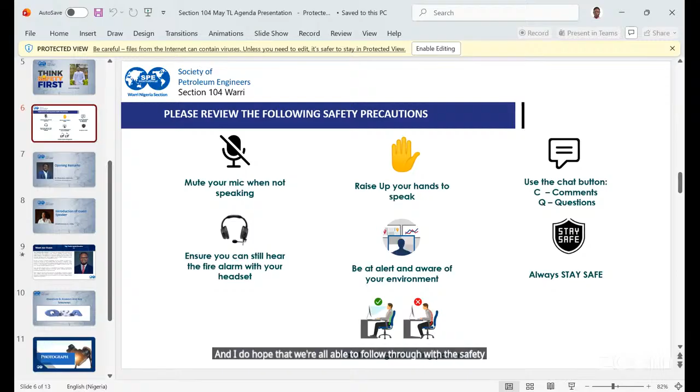This is another eventful technical session, and we are privileged to have Engineer Dr. Oluwadero on the call with us. It's an honor to have him as one of our technical presenters.

I want to appeal for everyone already on the call. Please, this is one of the rare opportunities where you hear technical professionalism coming into play in the sense of flow assurance. Please, for every student, young professional that hopes to be involved in flow assurance, this is an opportunity and eye opener. Get your pens, get your things ready to learn.

And for some of the student chapter presidents I'm seeing on the call, kindly put it on your general platform, let your people join now. I'm not seeing PTI especially being represented yet. I'm not seeing FUPRE being represented yet. And I'm not seeing most of my young professionals joining, let's assume it's because of movement, rain, and the rest.

So I believe in the next 5-10 minutes before the presenter will go into details, a lot of us would have joined to learn for this August presentation. This is not just a lecture. This is not just a teaching. This is actually a technical presentation with the right perspective to delve more into flow assurance for all.

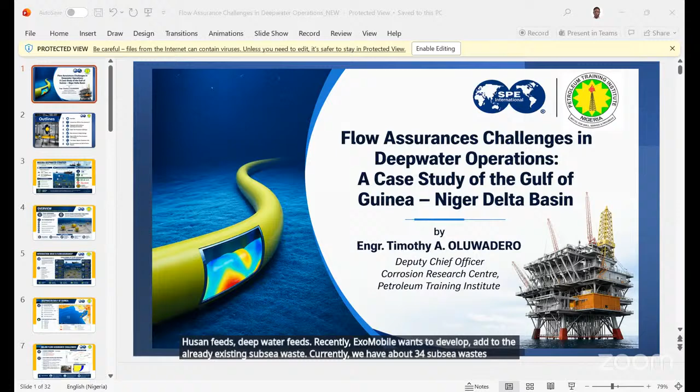So Nigeria's current strategy is to look to deep water development, where there's reduced vandalism, stronger asset security, and stable production systems. We've heard that companies like ExxonMobil and Shell were disinvesting from Nigeria, but predominantly we see them coming back one by one, investing hugely in deep water fields. For example, at Usan deep water fields, ExxonMobil wants to add to the already existing subsea wells. Currently there are about 34 subsea wells there, and they're about to add more, rejigging the operating systems to bring forth more production from these brown fields, spending about $1.5 billion in investments.

Also in Owowo, ExxonMobil says they will reach the final investment decision as early as 2027, projecting about 7 to 8 billion dollars for that decision, as there's about a billion barrels of developed resources within the Owowo field. In the ERHA field, they're currently extending the production sharing contract to 2042. So a lot is going on in deep water operations currently.

As a matter of fact, my slide is about one week old. Day before yesterday I heard Shell saying they are ready to put about $20 billion into Bonga Southwest field, where they expect to get about 150,000 barrels per day and about 140 million standard cubic feet of gas every day. So a lot is going on in our deep water operations, which is a strategy to rev up production in Nigeria.

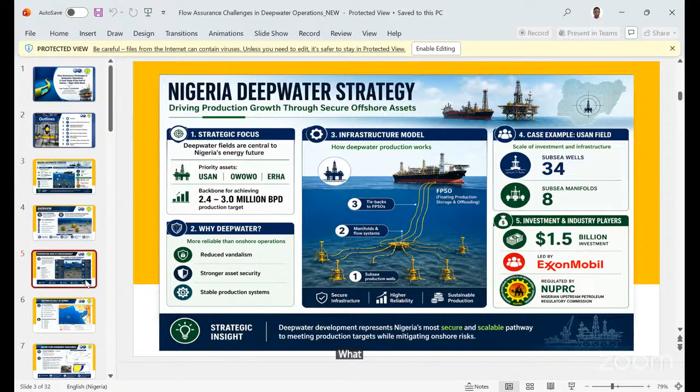This leads us to what we call flow assurance. With deep water operations comes the most critical technical and economic risk, which is flow assurance. This combines a lot of factors: operating in the water body, the ultra deep water conditions, whether to the FPSO or the platform, requiring long tiebacks of pipelines, risers, subsea wells and manifolds back to the platform or FPSO being engaged.

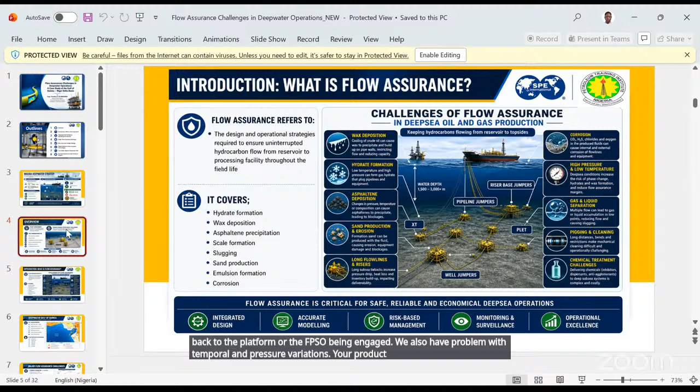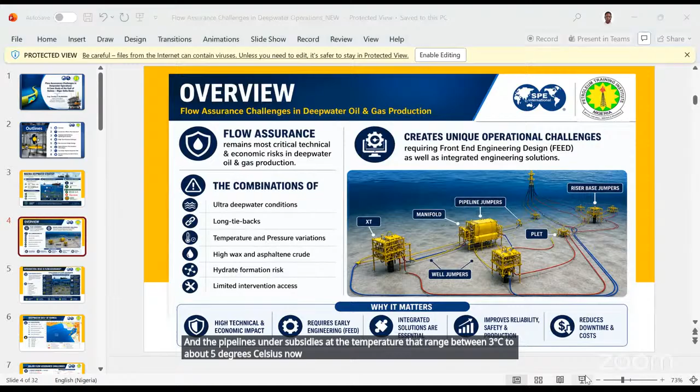We also have problems with temperature and pressure variations. Your crude oil comes from the reservoir at maybe about 80 degrees centigrade, while the pipelines under subsea have temperatures ranging between 3 to 5 degrees Celsius. So immediately the crude at 80 degrees centigrade meets that low temperature, it begins to lose heat through conduction and convection. When they lose their heat, there are big challenges, as we'll see later in this study.

Then also we are talking about deep waters, as we will soon see, some of these are between 1,500 meters to 3,000 meters deep water bodies. So interventions are limited. Access to well interventions and all that are very, very difficult.

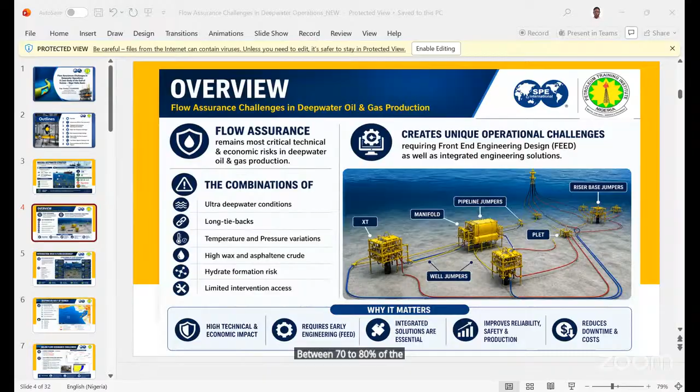So in setting up deep water operations, you have to first consider what is called front-end engineering design. This front-end engineering design is the detailed pre-construction engineering that defines exactly how the project needs to be executed. This must come between your conceptual details and engineering, procurement, and construction. As a matter of fact, at this point, between 70 to 80% of the final FID, that is final investment decision, must have been made.

So to develop this oil field, you need to set in place beforehand how are we going to produce it. What provisions are we making for wax depositions? What are we making for hydrate formations? What are we making for well interventions? So it starts from that period.

So you need integrated solutions that are planned beforehand before you move to deep waters. You don't just start in the middle. It will cost money, it will lose production, and so on and so forth. So let's see what flow assurance is per se.

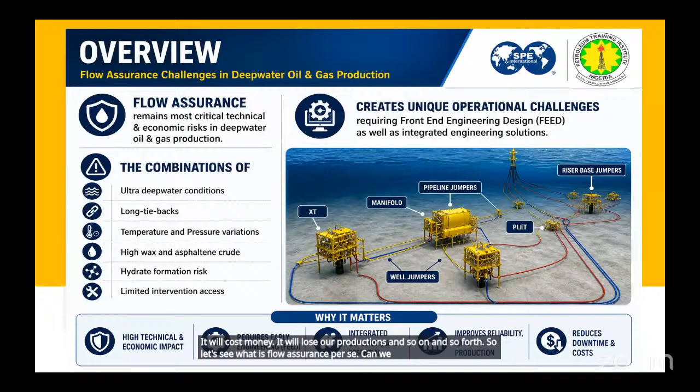So what do we have? We need flow assurance designs that cover hydrate formation, wax deposition, asphaltene precipitation, scale formation, slugging, which we will see very soon, sand production, emulsion formation, and corrosion. I just highlight a few of these as we go on in this presentation.

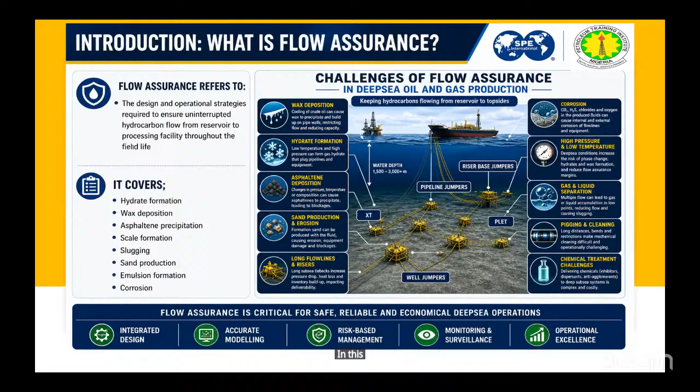So we are talking about the Gulf of Guinea currently. The key characteristics of this Gulf of Guinea involve water depth, as I've said, between 500 meters to 3,000 meters - that is very deep water. The seabed temperature is from 3 to 5 degrees Celsius. And we have long subsea tiebacks, so we can have about 20 kilometers to about 120 kilometer tiebacks. So our riser could be about 3 kilometers high, while the subsea tiebacks could be between 20 kilometers to 120 kilometers - that is essentially long distance.

So the temperature that comes into the wellhead, before it gets to the PLET or before it gets to your processing platform, the temperature is gone. Then you fall into a situation whereby hydrates could form, wax could be deposited, asphaltene could be precipitated. Then there are a whole lot of other situations, slugging could come in. So as I've said, we have limited intervention within this Gulf of Guinea.

So in the Niger Delta, we have typical fields within that Gulf of Guinea. Some of the fields we have are Bonga field, Agbami field, Egina field, Akpo field, Erha field - those are some fields. These are familiar fields that we all have, and these are deep waters. Some of them are brown fields. Some of them we are opening up, as we currently have the Bonga Southwest field that I told you just now - ExxonMobil is proposing to invest about $20 billion in that regard.

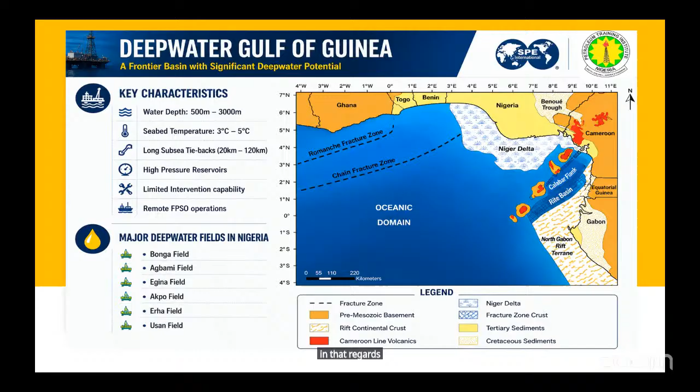For hydrate to form, there are situations that help accomplish that. The first one is that the pressure must be high. The well pressure is high, and you can begin to see a little bit of reduction within the pipeline as it flows from the reservoir, but the pressure must be high. The temperature must be low. And also, there must be water, the presence of water.

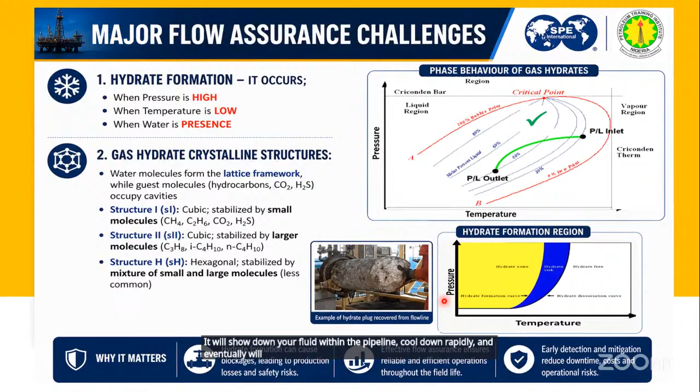You don't want, during shutdown, your fluid within the pipeline to cool down rapidly and eventually lead to hydrate formation, providing the conditions that favor hydrate formation. So let's go on to the other slide so we don't waste so much time here.

So for example, this is our wellhead condition. As you are producing, as your fluid is coming from the wellhead, going towards this one, the pressure is relatively not too low, but it's still high, whereas the temperature is steadily coming down. If you continue to do that, you will fall within these hydrate risk zones where the fluid within the pipeline will form hydrates.

So what you want to do is offer an operating condition that returns this back to favorable conditions where the temperature is still high and the pressure is low. So that's what you want to do.

So sometimes, as I mentioned earlier, what people do is add inhibitors. But you also have to be careful because inhibitors are expensive, like the MEG, monoethylene glycol inhibitors, which are highly viscous. If you don't know how to apply it effectively, it can also cause the fluid to become more sluggish, so you don't have to apply so much.

You just want to get your hydrate equilibrium curve to a safe and optimized region, the green line over there. If you have too much inhibitor, you'll have the hydrate formation curve far to the left, which is over-inhibited. This is over-inhibited condition, this is low safety margin, and this is under-inhibited conditions.

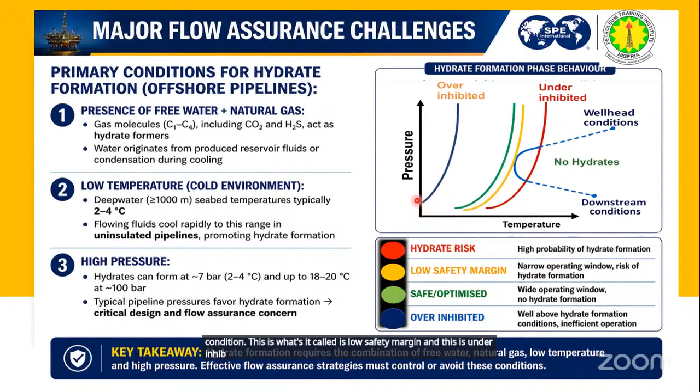In Niger Delta crude, we also have the problem of wax deposition. Nigerian crude is highly paraffinic, with about 30 to 45% of our crude having that composition of hydrocarbons, so there's a great challenge about wax deposition. It can cause major operational issues including pipeline blockage, decline production rates because it fills up the entire cross section of the pipeline, and it costs a lot to carry out remediation and maintenance once this wax deposition has formed.

We have a number of factors that lead to this. As we said, temperature is most dominant. You want to avoid the wax appearance temperature.

Then, pressure reduction. As the pressure reduces from reservoir or wellhead conditions and the fluid continues to flow, the gaseous content within the production fluid begins to get liberated. As the gas is liberated, the fluid becomes more viscous, which becomes a favorable condition for wax deposition to set in.

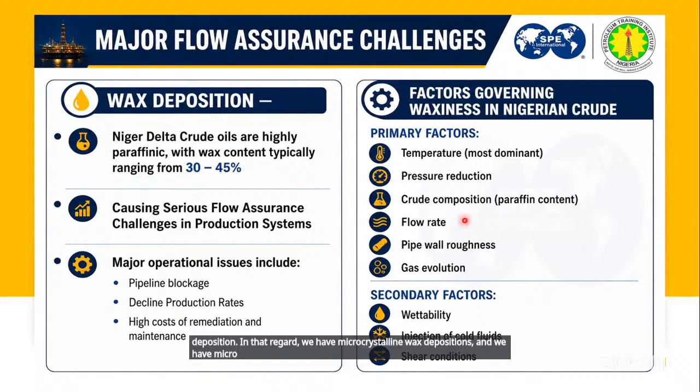In that regard, we have microcrystalline wax deposition and we have macro, as we soon see. The paraffin structures that lead to this wax deposition include what is called straight chain, which are normal paraffins, and the branch chain and cycloparaffin chains, that is naphthenes, which also form this wax deposition. You can see here.

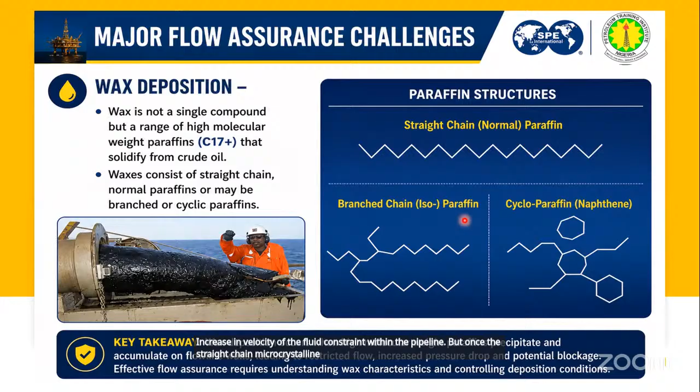As you can see here, we have the straight chain paraffins, which are responsible for the formation of microcrystalline wax deposition. Why is that? They are able to form tightly and neatly a lamellar structure that is very difficult to break, with high melting points. Unlike the amorphous wax deposition, formed by the cycloparaffins and branch chains, which are softer and thicker—they are not as strong, and can easily be sheared by an increase in velocity of the fluid within the pipeline. But once the straight chain microcrystalline wax molecules are formed, they are very difficult to remove. That's the contribution of the chain structures of these wax molecules.

There's even another situation, especially during shut-in or shutdown, where if the temperature of the crude oil continues to reduce and stays below the wax appearance temperature for too long, you form a gelation kind of fluid that is very difficult to move.

As a matter of fact, you cannot move it until you overcome a threshold shear stress that must be applied, which sometimes will be more than the normal operating pumps, before the flow can proceed. Once the wax causes the crude oil to gel, as we have here.

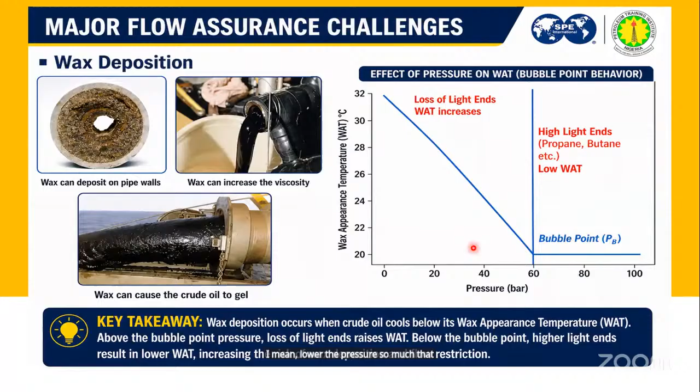So you want to also maintain, you don't want to go below bubble point as you even depressurize, so that the wax problem, because you are running from hydrates, you don't want to lower the pressure so much that it crosses the bubble point. So these are give and takes that goes on with planning and flow assurance within deep water operations.

So like I said before, once your wax causes your crude to gel up, you need what is called breakaway yield strength, which people dealing with multi-phase fluids call the Bingham model, to overcome the yield strength before you can have a reasonable flow again.

Sometimes when these wax fluids get deposited or our fluid becomes dilated, what happens is that we have what is called thixotropic nature of fluids, whereby increase in shear rates definitely leads to reduction in viscosity once we overcome the yield strength.

So you don't want your crude oil to gel within the pipeline, because it costs more, it takes more effort to be able to get the fluid flowing again. And as I said initially, we have two main wax deposition mechanisms: molecular diffusion and shear dispersion. Molecular diffusion is what we have when we have laminar flow.

As I said before, we have laminar flow when the viscous force is greater than the inertial force. So they are dominated by molecular diffusion driven by temperature gradients. What I'm saying here is that when you have your pipelines and the fluids are flowing gently, easily, the wax deposition mechanism is called molecular diffusion.

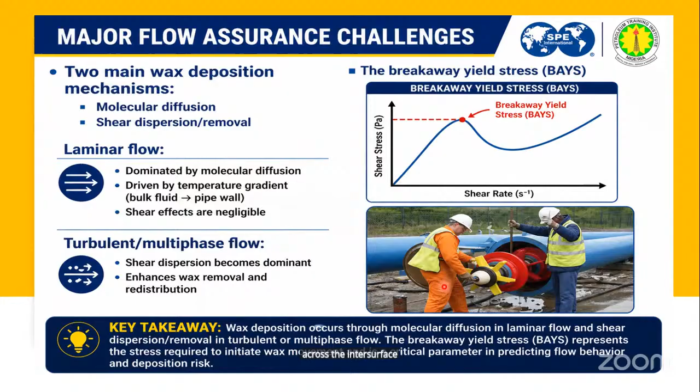So in short, this is the breakaway yield stress I was talking about earlier. You can calculate it, it can be modeled. This is the pipe diameter, this is the pressure, this is the differential pressure, this is the length of the pipe. You can calculate the needed breakaway yield stress to mobilize already gelated crude oil within your pipeline. So that can be used to calculate the shear stress, the threshold shear stress that you need.

So let's talk more about this diagram. Let's say we have a pipeline that ordinarily has an overall heat transfer coefficient of 10 watts per meter square degree centigrade. Then as our crude oil flows from the wellhead across this distance, 2,000 meters, 4,000 meters, 6,000 meters, and so on...

The red line here is the wax appearance temperature. This is the temperature where the wax molecule begins to nucleate, crystallize, and deposit. So as your fluid continues to flow, by the time it gets to 2,000 meters, the temperature of your fluid is already getting close to 60, 50, and then you have crossed the wax appearance temperature. Then wax has begun to form within the pipeline.

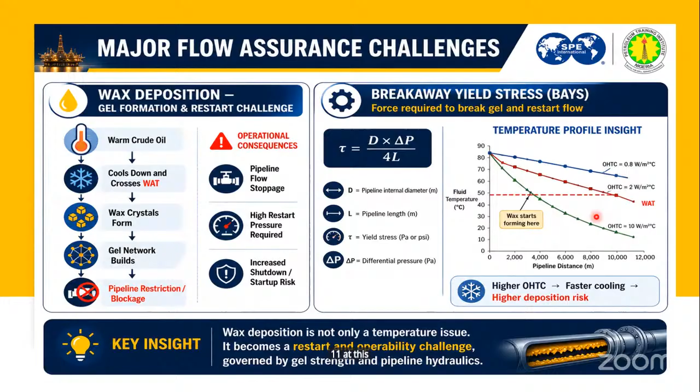Thank you sir. Some other challenges that we also have is slugging, and there are different kinds of slugging. We have stratified flow, stratified wavy flow, plug flow. Slugging happens when you begin to have within your pipeline the intermittent flow of liquid plugs as well as gas pockets flowing together. This can cause serious problems within a pipeline.

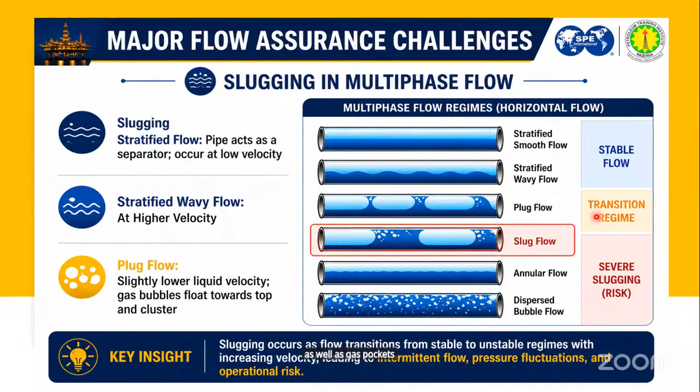There are different types of slugging mechanisms. We have hydrodynamic, we have terrain, we have severe riser slugging.

Let me just speak more on this severe riser slugging because of time. You have your riser connecting from your pipeline to the FPSO or your platform. What will happen when you have a long stretch of liquids and pockets of gas is that when it gets here, the reason why this happens is because gas travels at higher velocity. Gas produced within your pipeline travels at higher velocity than water, which is expected, or than crude oil.

What happens is that when the crude oil gets to the base of the riser, it settles there and blocks the pathway of the gas. As it settles, gradually there's a large liquid slug, but gas starts to build up behind that slug. Then at some point, the pressure of the built-up gas will suddenly push the crude into the separators and all those things, which you don't want.

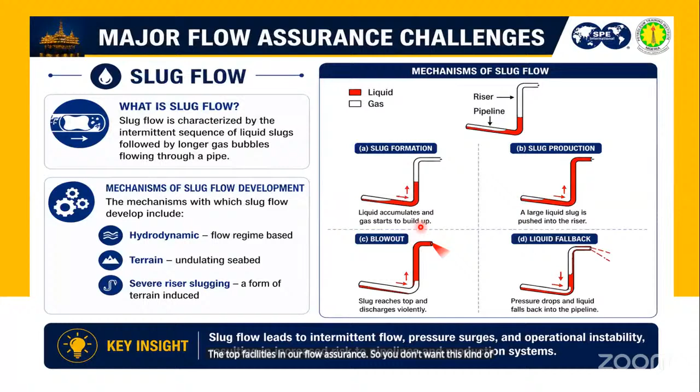Number one, it causes unstable production. It causes your separator to be overrun or flooded, so you cannot specifically separate the liquid from the gas or from the water and oil. It also comes with vibration, structural stress, and facility loading that can damage the topside facilities in our flow assurance. So you don't want this kind of production, but you do have it if you cannot predict this kind of flow that happens within our facilities.

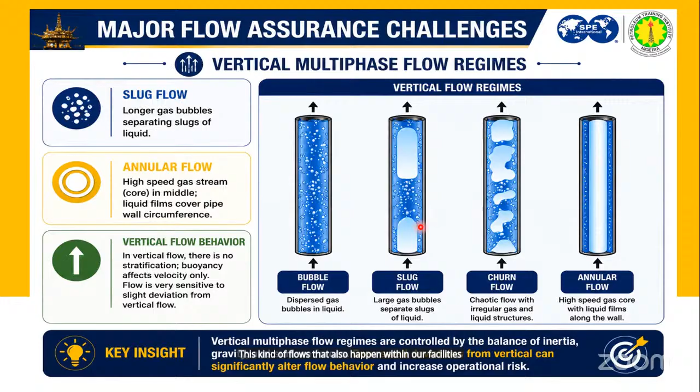The slide will be available, and we'll go through some of these things. So what do we do now?

Let me slow down a little bit to explain this. Let's assume this is our crude oil, this is our pipeline, this is our insulator, and this is another pipe and pipe system. Your fluid temperature is highest at this point. Then via convection, the fluid is losing its heat, moving from this fluid to the pipeline material.

Then via conduction, the heat is also flowing through this material to the insulator. Then via conduction as well, it moves from this insulator material to the outer pipe. Then via convection, the heat flows from this pipeline to the ambient seawater. You can model the flow, the heat flow, for each of these elements, and eventually get the overall heat flow rate across this design.

So you want to manage heat transfer. You want to be sure of the kind of property that will get you the amount of heat flow rate that you need. You can easily model this.

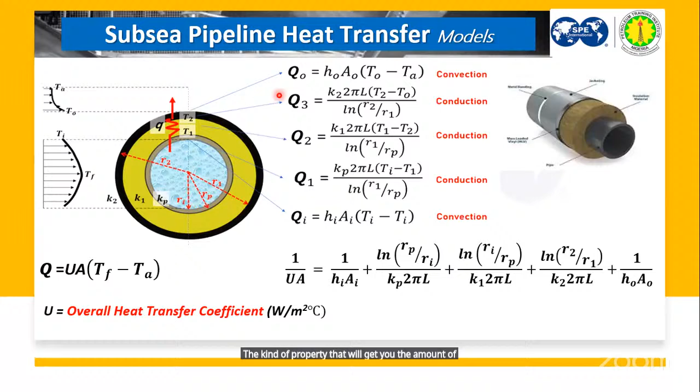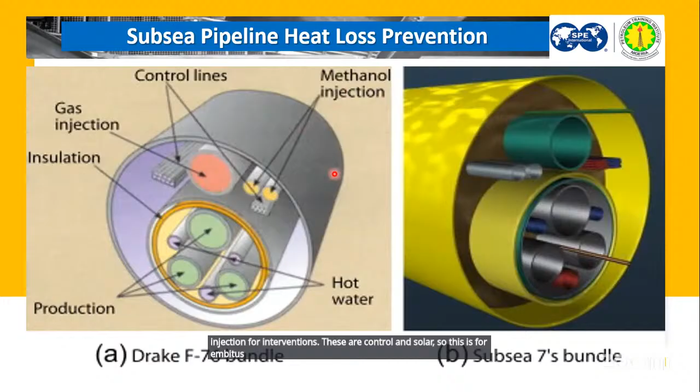This is also a pipe-in-pipe situation where we have this production pipeline. Hot water is being supplied through some pipeline within this one. This is an insulation, this is gas injection for interventions, these are controls and so on, and this is for methanol injections and so on. So these are some of the designs laid within the seabed.

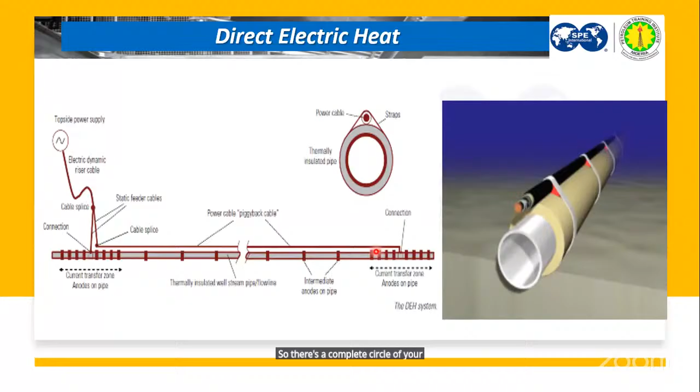You can also do what is called direct electric heating, where you use alternating current and use your pipeline as the conductor. Because there's a heat of resistance, it will be generating heat, and that heat will be warming up the fluid composition within the pipeline. You send a return cable back to the platform, so there's a complete circuit for your pipeline. This will help you warm up your fluid, especially during shutdowns.

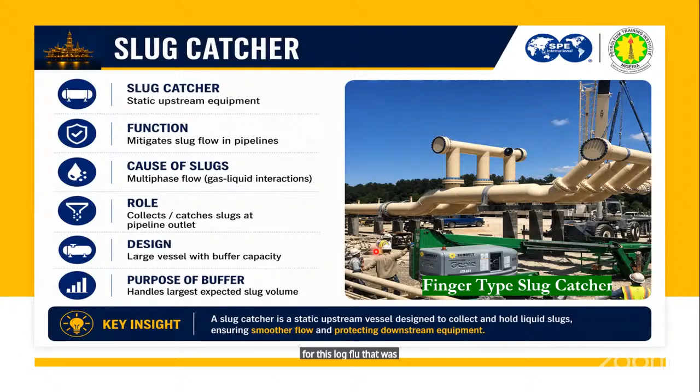These are also some other methods. Another method we use is the slug catcher, for the slug flow that I was explaining earlier. We have mainly two types: the finger type slug catcher and the vessel type slug catcher. These help prevent all that vibration and so on.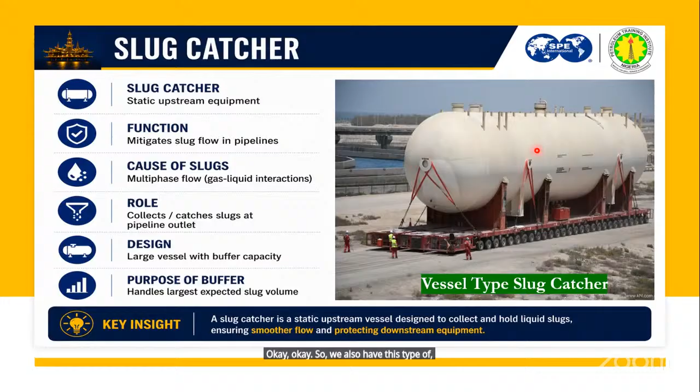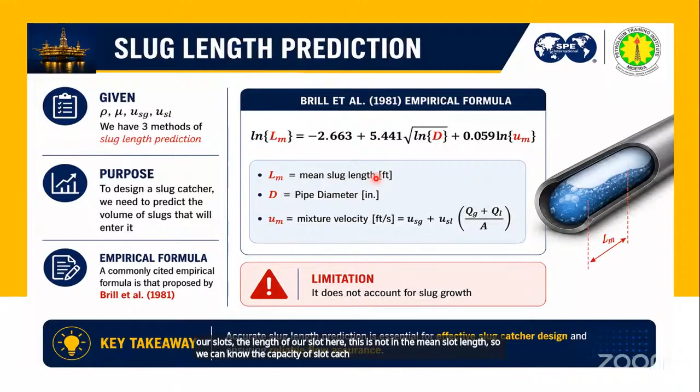So there are a number of models we can use, empirical formulas to predict our slug growth, I mean the length of our slugs here. This is modeling the mean slug length, so we can know the capacity of slug catchers we need to put in place based on the conditions of our operations, and so on.

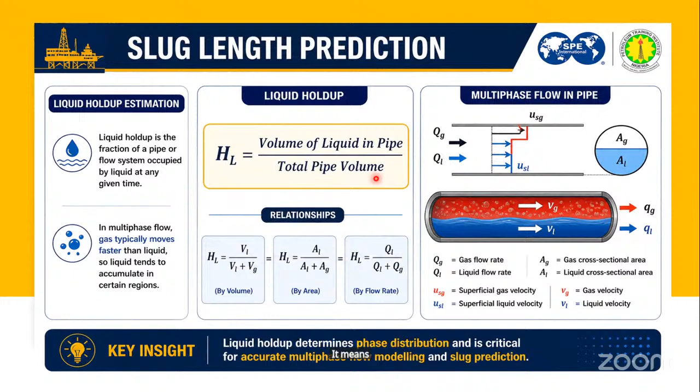Also, there's a model in the slide for calculating liquid hold-up. Liquid hold-up is defined as the fraction of a pipe or flow system occupied by liquid as opposed to gas in any pipeline flow system. The models are available for discussion, and there are methods for modeling liquid hold-up. Some methods assume what is called no-slip conditions, meaning the velocity of the gas and velocity of the liquid are the same within the pipeline, which is not reality. So this alternative method is better to predict liquid hold-up.

So we have a few fields in Nigeria. We have what is called the Bonga field.

It commenced production in Q4 2005, not 2025. Some of the documented flow assurance issues we have in that regard are high pressure, low seabed temperature, severe slugging, wax depositions, and so on.

The conditions around this are that the water depth is about 1,000 meters, and the subsea tieback is about 2 to 10 kilometers. This is not even that long. We have long multi-phase flow lines, cooling, terrain slugging, and all that.

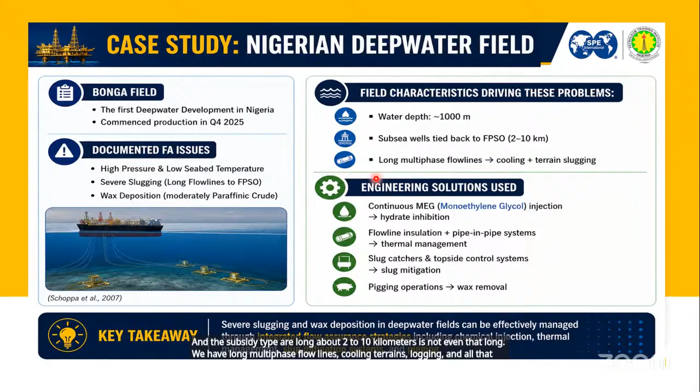The number of engineering solutions available are also listed. We also have, as for the Erha field, documented flow assurance issues such as hydrates, asphaltene deposition, emulsion effects, complex reservoir fluid, deep water cooling and pressure drop, long flow paths, and long multi-phase flow lines.

These are some of the things. Engineering solutions currently used include management of hydrates, asphaltene inhibitors, heated flow lines in critical sections, and so on. OLGA is one of the software we can use to also manage some of these deepwater facilities.

I hope that SPE can facilitate cooperation between the industry and training institutes like Petroleum, where we can get student licenses to use this software to train them, because the full license is expensive.

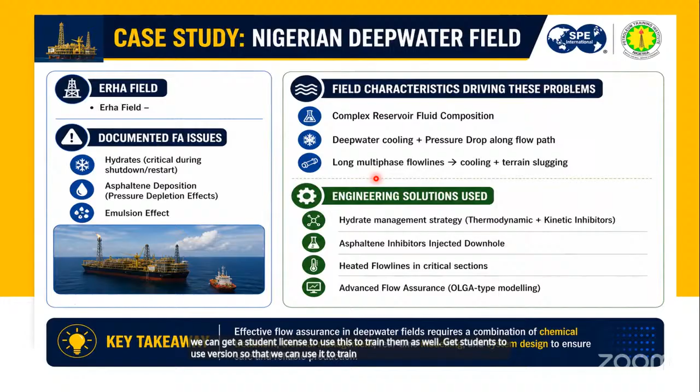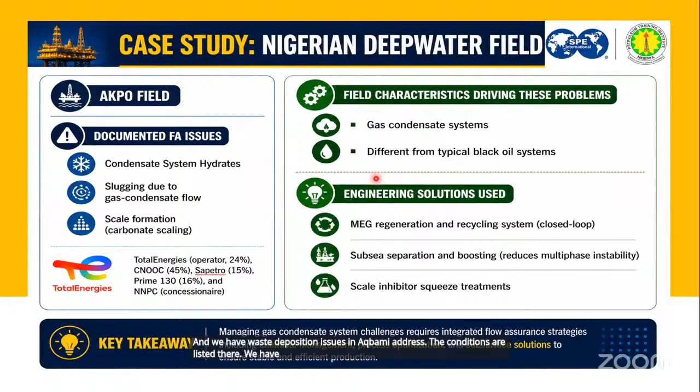My recommendation for the Gulf of Guinea is early flow assurance integration. We must incorporate flow assurance consideration early in field development planning. It's not in the middle that we begin to plan for flow assurance—it must feed into the FEED, the early engineering designs, so that we don't have frequent interventions, which are very difficult to do.

Digital monitoring adoption—digital twins, artificial intelligence—should be deployed. Where we emphasize more is the next two: local capacity development.

Nigeria is moving towards what is called deep water operations. We need to provide local skills, manpower, and local content that will be able to man this.

Places like Petroleum Training Institute, where I proudly work, are ready to collaborate in facilitating short courses for people who are willing. We can partner with others in other countries who can help make some of these software available and train and develop manpower, so we can function effectively within this new era of deep water operations. Then we should have regional flow assurance research.